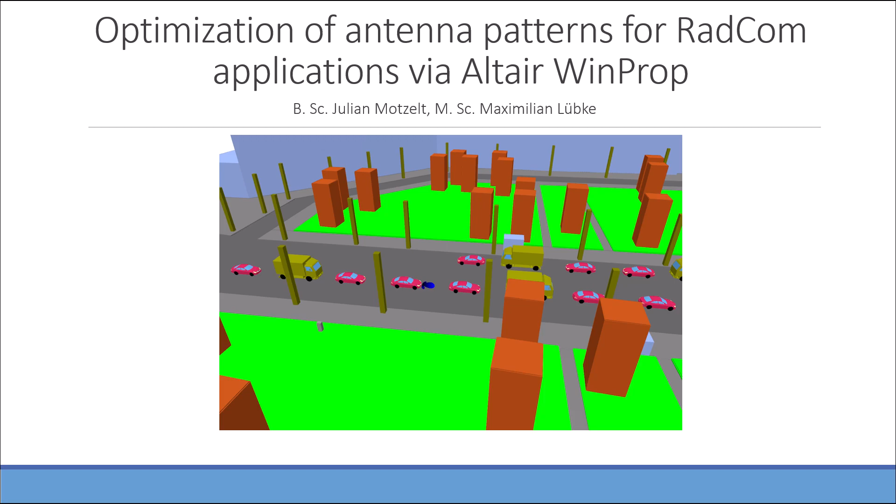Our goal was to compare different antennas with respect to the performance in RadCom applications. This means the combination of radar and communication. The main focus was the investigation of the communication.

For this we used the tool WinProp by Altair. The WallMan vector database for the replica of the Leipziger Platz was created by Maximilian Lübke. With this replica we simulated different urban automotive scenarios in ProMan.

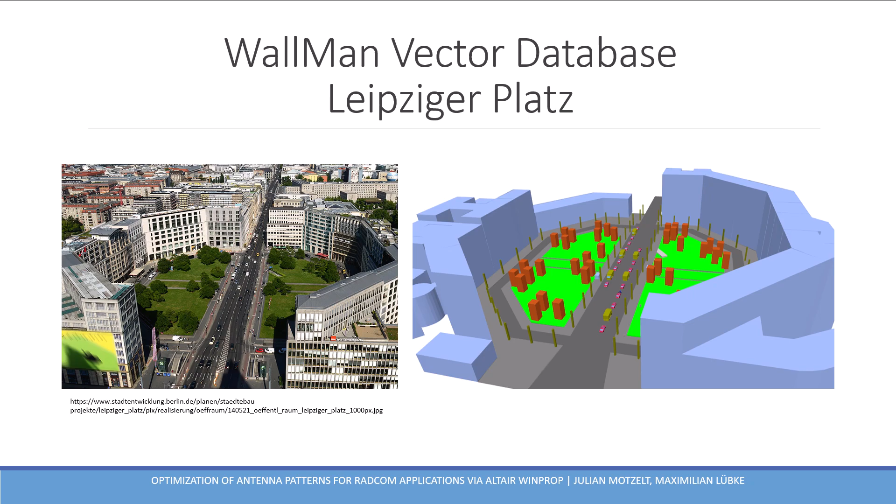Here you can see the 3D view of the recreated Leipziger Platz in WallMan. Two different vehicle platoons can be recognized, each with 10 vehicles moving towards each other. Car 4 and Car 5 in the right platoon were chosen as the transceiving and receiving vehicles in this scenario.

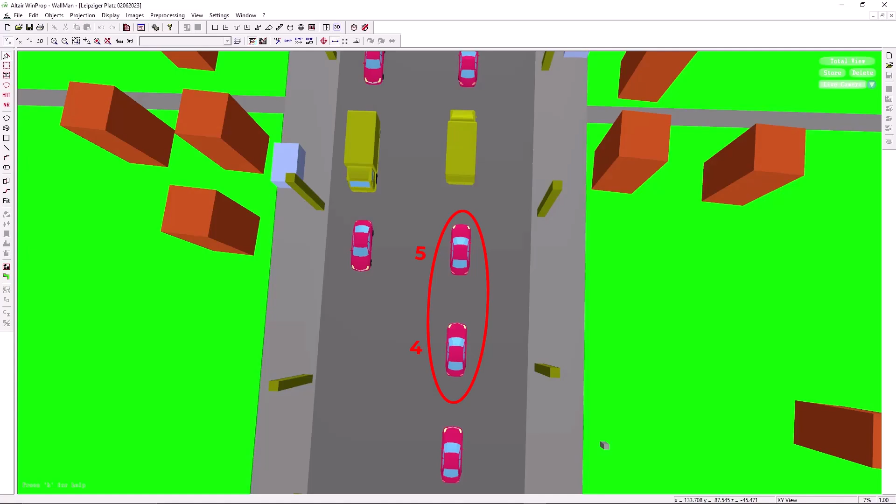For the cars we used the model of a Mercedes C350 given by Altair. To investigate the antenna performance based on the array size, Car 4 was equipped with a transceiving antenna at the front bumper and Car 5 with a receiving antenna at the rear bumper.

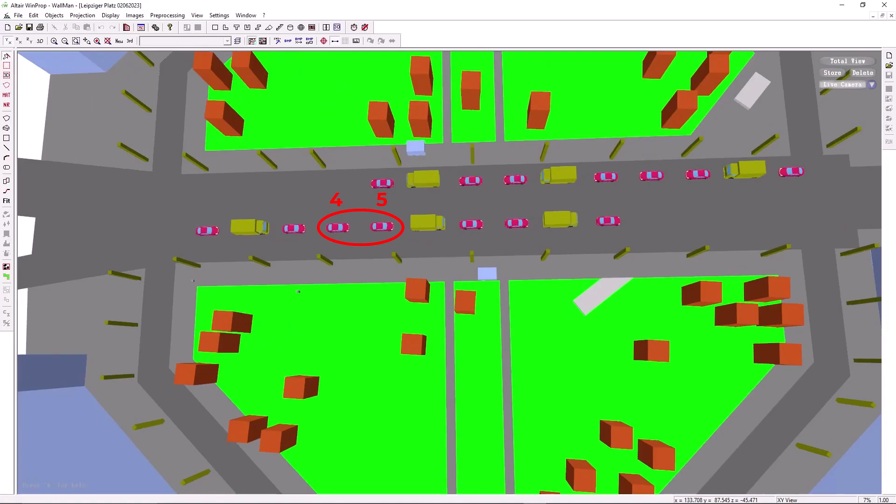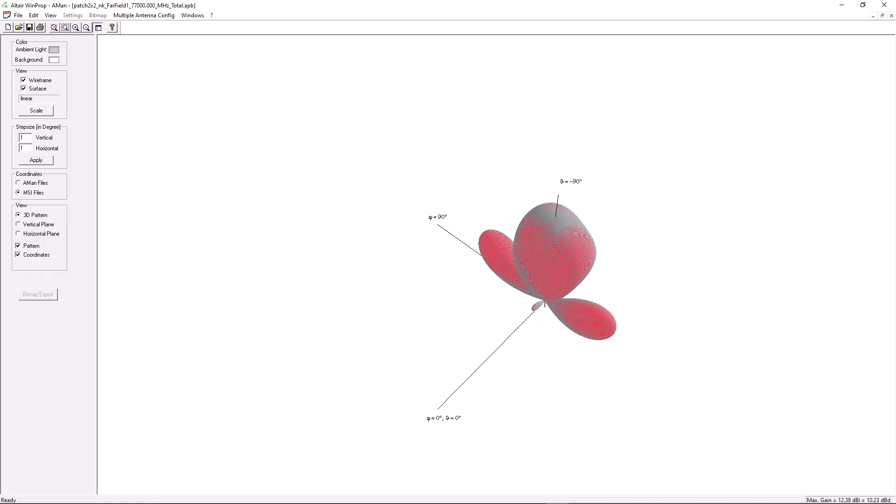First, we started with a small antenna array, a 2x2 patch antenna with high side lobes. The 3D antenna pattern is shown in the Altair WinProp antenna manager. As you can notice, the antenna pattern is not very focused, which reduces the antenna gain. On top of that, the strong side lobes of this antenna are evident in the antenna manager.

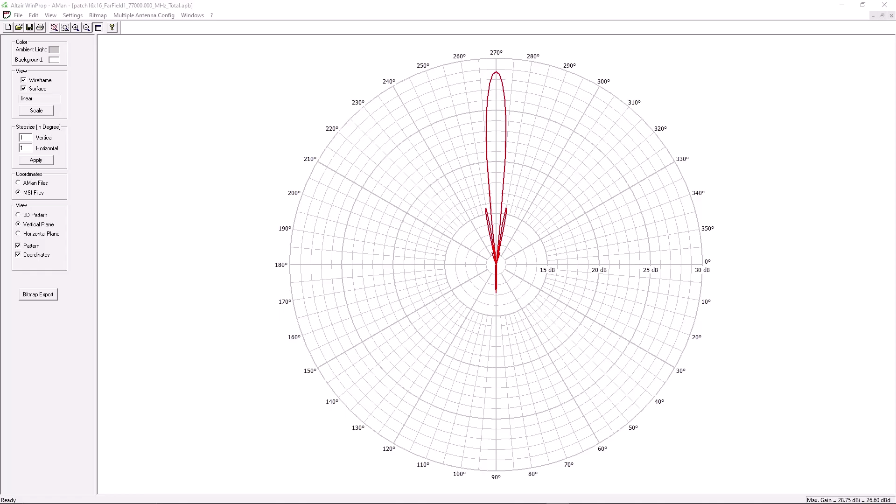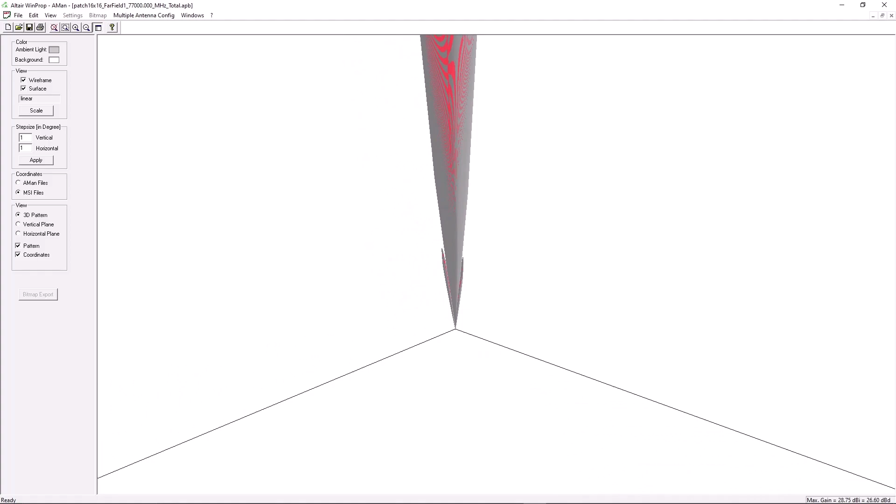To overcome this disadvantage, we created more directed antennas. In this example, a 16x16 antenna pattern is shown, which was the most focused antenna used in my thesis. Building this antenna, we have to spend the largest number of individual antenna elements. In return, we get a highly directional antenna pattern and thus also a high antenna gain.

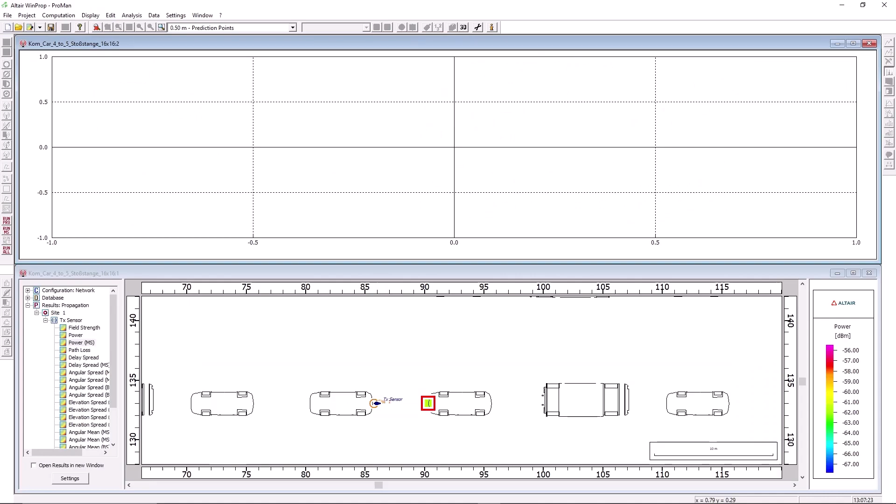So the setting remains exactly the same, only the transmitting and the receiving antenna was changed from a 2x2 to a 16x16 antenna array. Again, the impulse response of the simulation is used for the evaluation.

Comparing the results, the 16x16 antenna shows a much higher line of sight path with approximately -60 dBm received power. In addition, the multipaths at a high delay above 300 nanoseconds show significantly less power, which minimizes the inter-symbol interference.